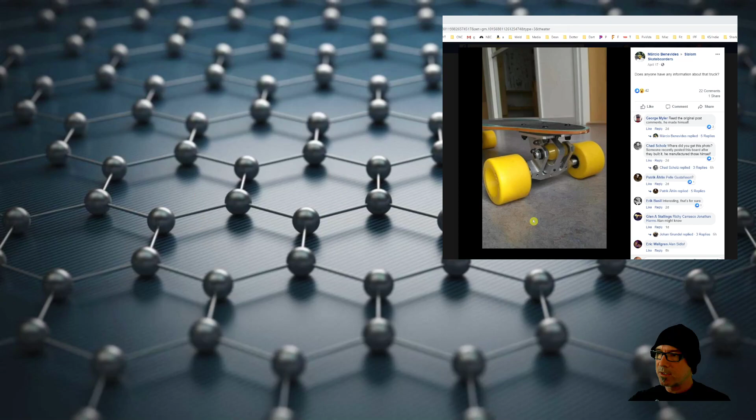First, let's get rid of that ugly face, put this little one down here, and take away that background image so we can look at a SolidWorks session instead of that Facebook thing. So what I have here came about by making the following parts.

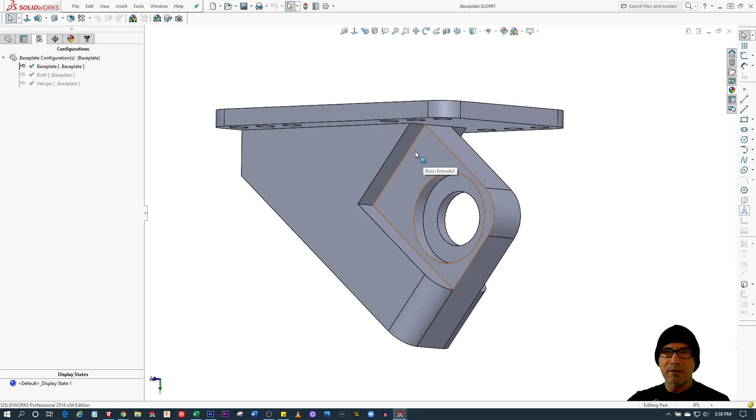Looking at the drawings, I think this is what's happening. The Facebook photo in question shows what I believe is going to have this feature and this feature, and some, but not all, of that.

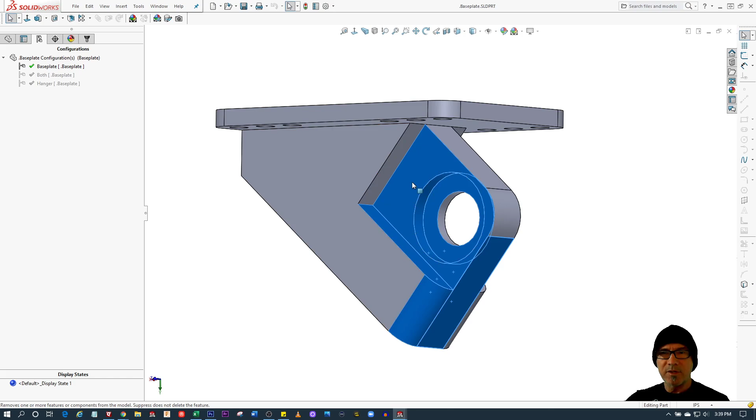I think it gets clamped inside this kingpin, what's usually a kingpin tower on a base plate, and that would allow you to have different inserts which fundamentally change the angle of attack. For this purpose, I just put a cylinder down there.

There could be, this is kind of an innie as opposed to an outie. It could be the opposite way, but I put an axis of rotation there.

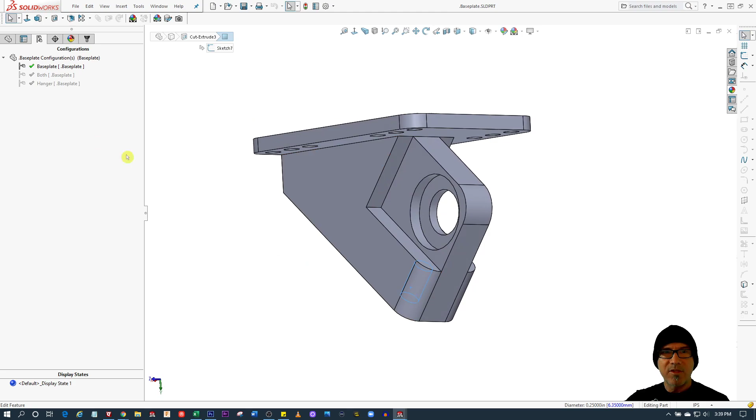Then I superimposed a hanger in that area, and the hanger alone looks like this. So I put the post on that. It could be exactly backwards, it could be removable, but that's what I think is going on.

So the thing is ultimately going to twist. Let me go back to my assembly.

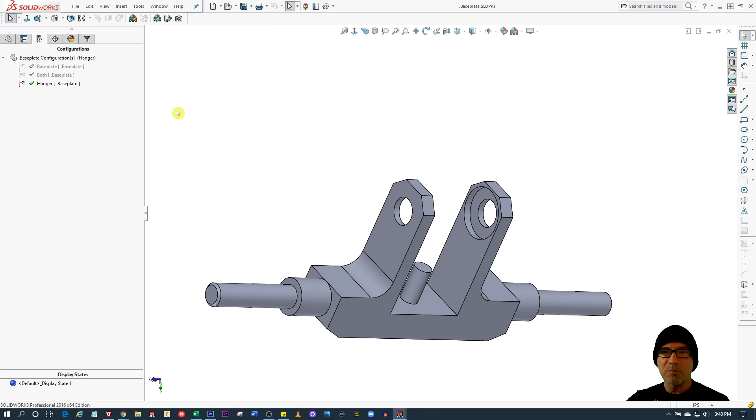I took some standard, meaning like 600 thousandths tall, conical bushings and put them into the bushing seat. What's interesting about this model is the bushing seat stays stable - it's easy for me to say - and the kingpin rotates through it.

So basically what you have is this. And there's no reason why this couldn't work, but it works differently.

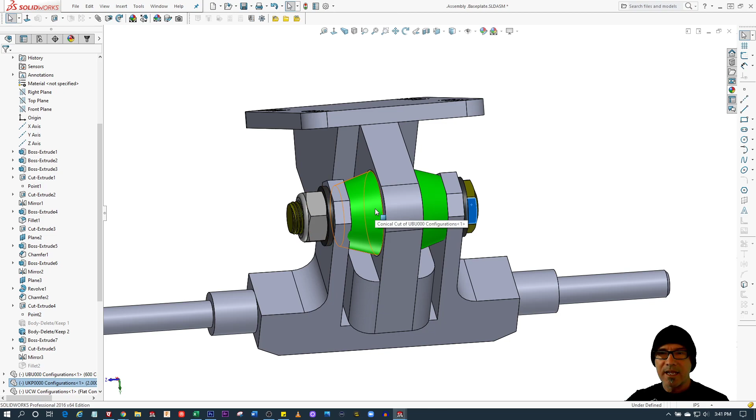So if, for example, you put a little slot or something to keep this head from moving back here, then in essence you could just rotate this lock nut and get a clamping force. But I think the clamping force is going to bend those sides a little, which may or may not be that big a deal.

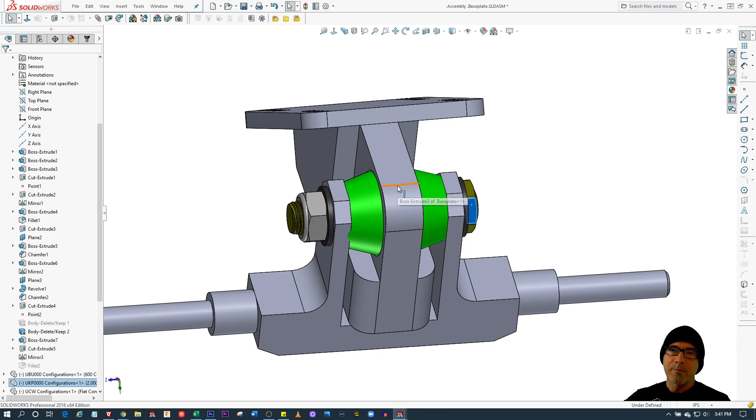But ultimately, that is what's going to provide some clamping force on the bushing seats in the middle and allow you adjustment. So if that is held in place, then you could spin this lock nut and it'd be adjustment in only one place, which is good because no skater wants to have to get out Allen wrenches.

Or hold one thing in this hand. That's why people never take their boards apart, because there's 8 lock nuts and 8 bolts, and you got to get a screwdriver and Allen key on one side and turn it, and they're all not accessible. Skateboarders are fundamentally lazy, so it would be good if it's a single adjustment point.

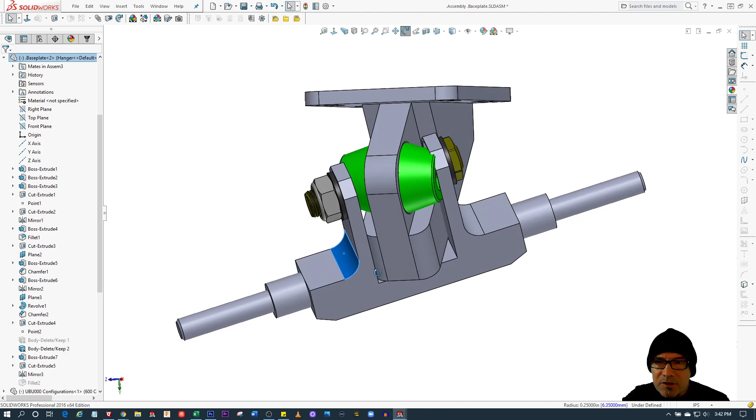I just eyeballed this thing and banged it out based on how big base plates generally are, and this could also be a 5/16 bolt and not a 3/8, not a real kingpin bolt. But I suspect that wouldn't be smart, since all the bushings you're going to find on the planet have a 3/8 inch ID.

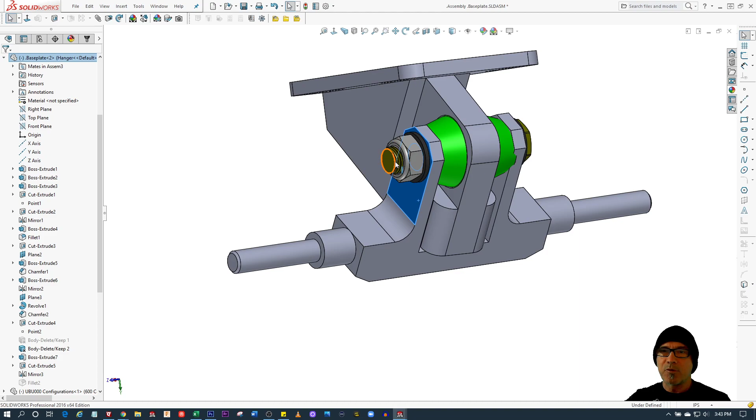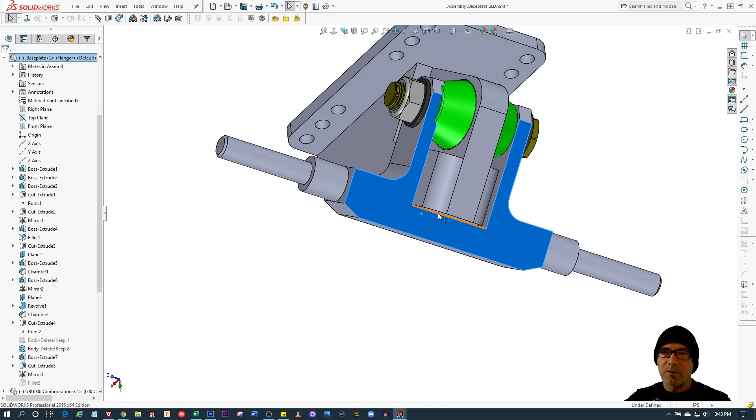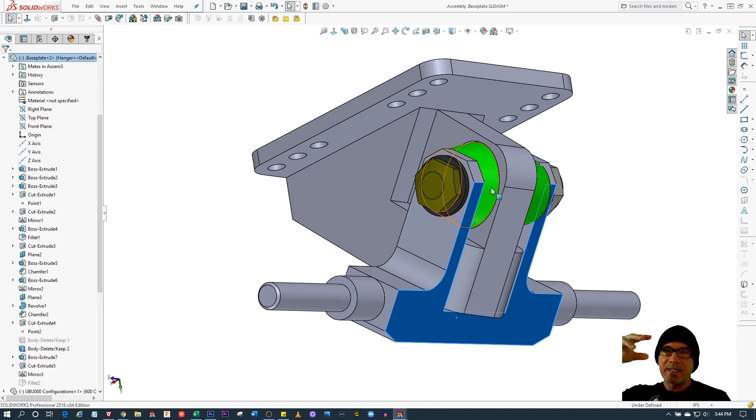So you could do that, but nobody wants to reinvent the bushing. 3/8 is kind of overkill because this is not a load-bearing member of the system. All it has to do is hold this thing together and provide that compressive force. But because this whole thing is actually supporting the rider - meaning this bearing or whatever is happening down there that this thing rotates on - that's where much of the load is taken. So you have an independent compression system up here, much the same way my fire trucks hold the weight of the rider with the bottom pivot and the hanger pivot, making the kingpin and the compression system completely independent.

So anyway, I probably talked too much here, but if you looked at that and were having a general WTF moment, I get it, because that thing is kind of weird, and I don't know how close my model ultimately comes to that, but it's in the ballpark.

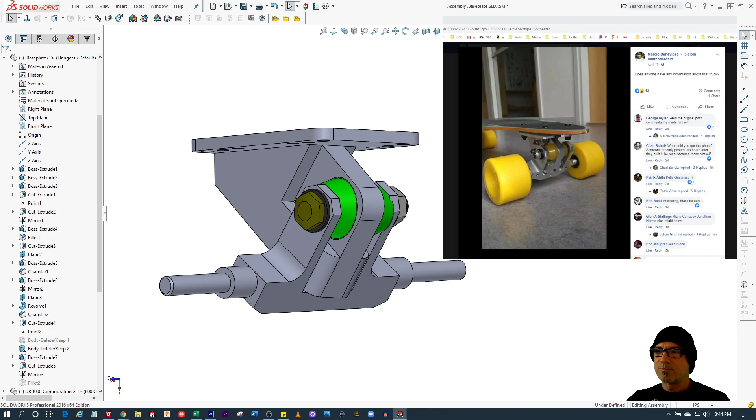So let me know if you guys figure out who made that, if he's ridden it, and if there's any footage of him riding the damn thing.

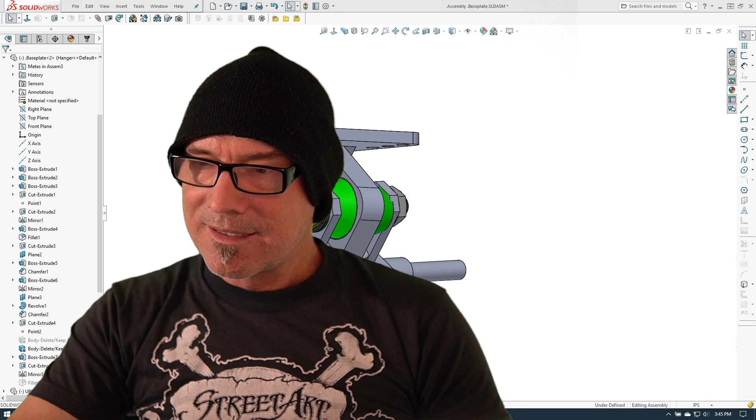Anyway, yeah, let me know if there's some footage out there of a guy riding the thing, because all the engineering and all the greatest ideas on the planet aren't worth a damn unless you can get them made, get them out, skate on them, and have them work at a reasonable price, and not make it a pain in the ass to adjust.

Because maybe I'll speak for myself - I'm lazy as all fuck, and I don't want to sit there with a surgery kit performing all this stuff. I just want to get my skate key out, lefty loosey righty tighty, get it on and go. I'll change bushings, I'll change wheels, provided they're built-in bearings and ABEC 11 wheels. One nut is all I can handle at a time, and everything should happen from that.

But this looks promising, looks cool. I'm all about the innovation, but more details, man. I did what I could. You guys go ahead and chime in. Chris Chaput out.